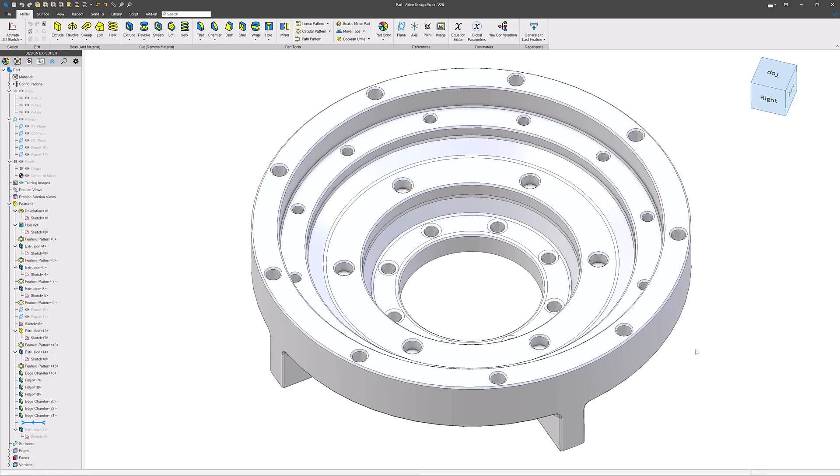There was a question on the Alibre forums recently that I thought was deliciously interesting and wanted to delve into. Here I have a part that might be able to demonstrate that question pretty well.

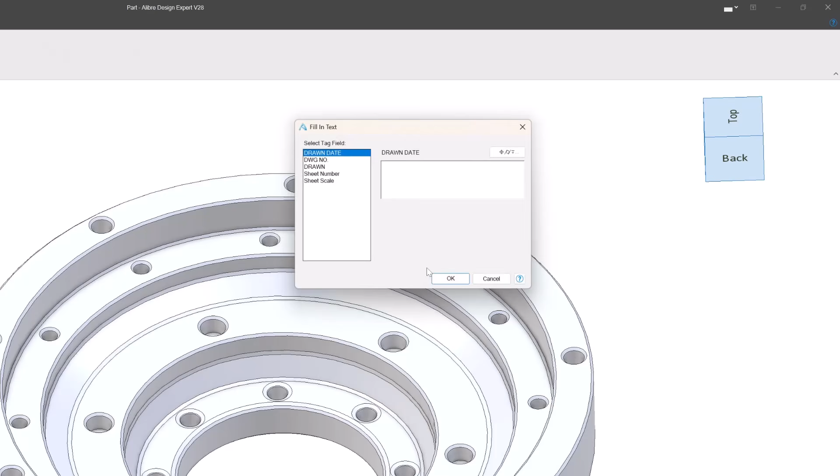We have some ribs, and let's say I want to take a section view and get a cross section of these ribs. For that, I'll jump into the drawing environment and talk about what that question was about. We'll say send to, make drawing, send it on, then get rid of the right view and say OK.

Now maybe I can adjust this so I can see my ribs. We'll say visible and hidden lines so I can see that rib sitting back there. I'll right click and activate a sketch in my view, create a line, and grab a midpoint constraint.

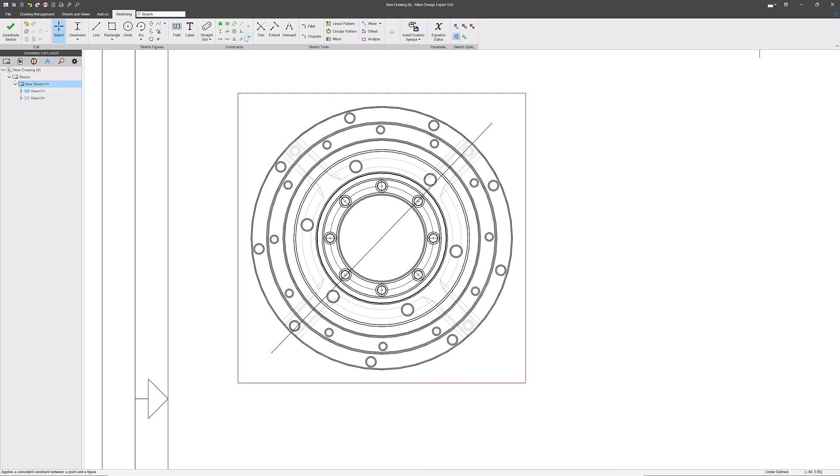We'll say that this line's midpoint should sit right in the center of our view, and since this is allowed to rotate, I'll grab a parallel constraint and make this line parallel to the rib. From here, I can grab a section view, and of course it asks me which way I want my section view to go. I'll select this one, and we're inserting a view that's about 45 degrees off horizontal. This is per, I believe, ANSI Y14.3, which talks about what the orientation of your section view should be. So we have some users saying, well, I want to rotate this view 45 degrees because I want it to have a more intuitive orientation.

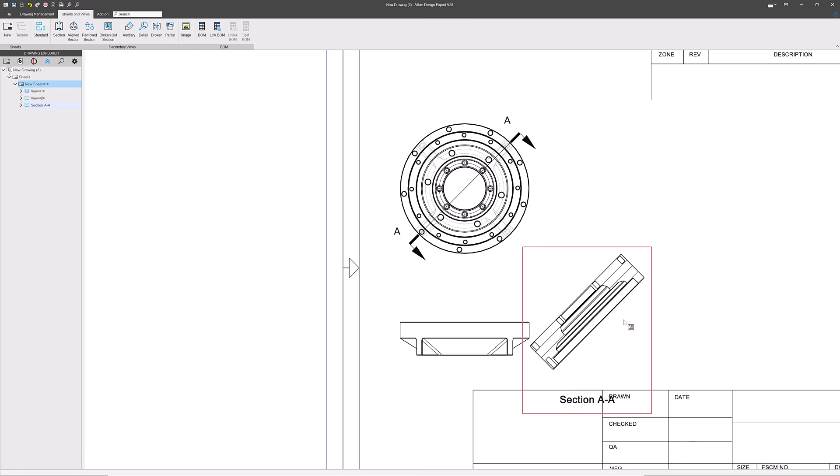And that's a fair request. I'm not aware that it meets any drafting standards, but sometimes you just need to draw something outside of drafting standards, and we have questions regardless, so I want to provide answers. I'm not going to claim that anything I talk about here is consistent with any drafting standard, but if you have a need to rotate a section view like this, let's talk about some ways to do so. The ways to do so are in this section line.

So one option that I have is I can add a little vertical. Now there's some things we need to be aware of. First off, when I go to create my section view, I'll click on this vertical here, and now I have one that is oriented in the vertical fashion.

You'll also notice there is some scaling going on, or at least some appearance of scaling. This is actually still in scale, but it's much smaller because we've cut this at 45 degrees, but we're looking at it in the direction of this arrow right here, so we're looking at a tilted, away from us, 45 degree version that appears smaller, and the dimensions aren't going to be accurate. They're going to be as if we measured the 45 degree angle from this vertical view. So this is probably not as useful.

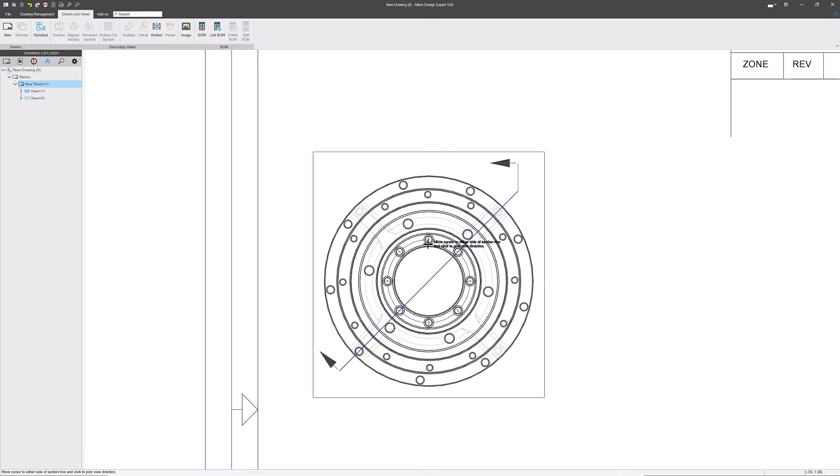And the other thing is, if I create a section view and click on my diagonal, that actually is the right size, and we're looking at it correctly and everything, but we're back to the 45 degrees. So how we can actually get this is we would say aligned section view, and just like that, now we're inserting one at the right size.

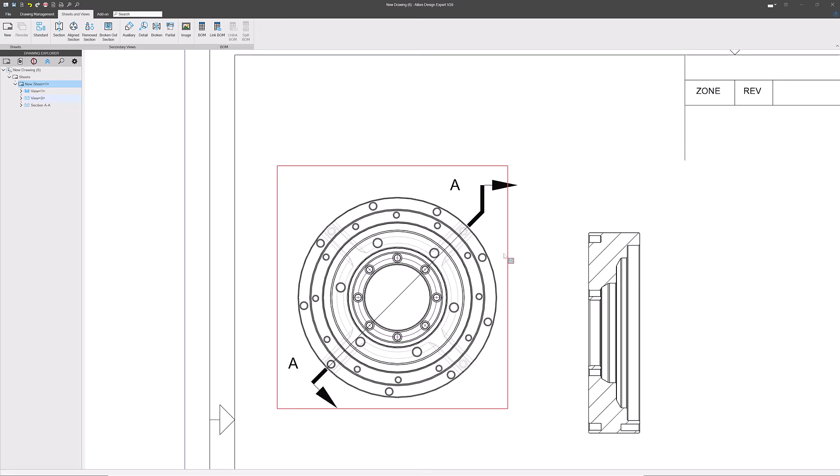Now that we've inserted this, we're going to see a few things. One, it's not aligned, right? If I start moving this, we can see it's not aligned with the previous view, but this is kind of to be expected because we've added this vertical plane of where we're also looking. So we have the entire length here, which if we stopped right there, we would be aligned, but now we have this extra view, so it pushes the view down a little bit.

Now we can always uncheck align and move our view so that we can be aligned. We can even add some helper sketches that help us align, and delete them later if we'd like to be really, really well aligned.

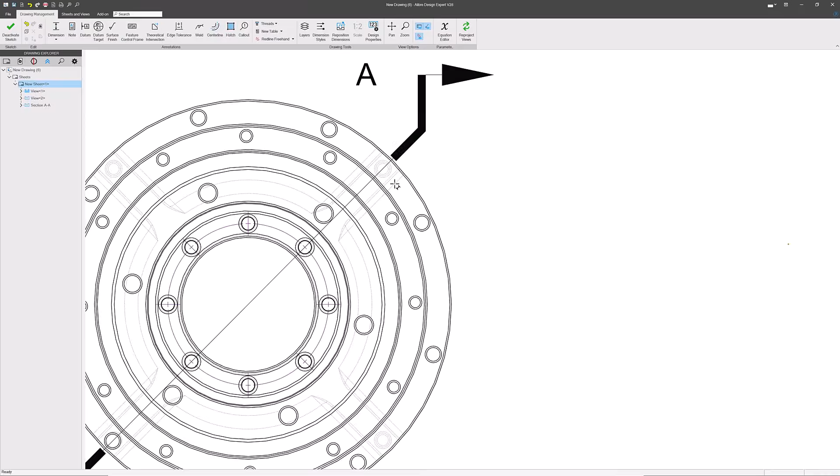But as you can tell, we do have a dimensionally accurate cutaway version, and we can see the holes here and here. We can also see these internal holes. If I have any questions, I can always add some dimensions to our drawing here, and I might have to click into our drawing. We're going to dimension here, and just like that we've got a diameter of 7.954. We'll come over here and give this a diameter of 7.954 as well, so we are quite exact from our parent and child views.

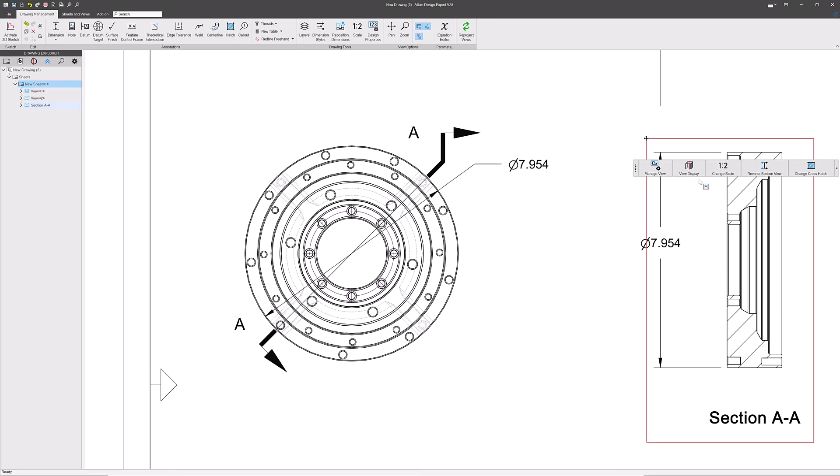A few other nuances we should be looking at. Notice that this vertical line has the arrow looking away from the model. What might happen if the arrow's pointed the other way? Because now part of the model would be intersecting the view of this vertical line. So I set this up deliberately so that this line would be looking away.

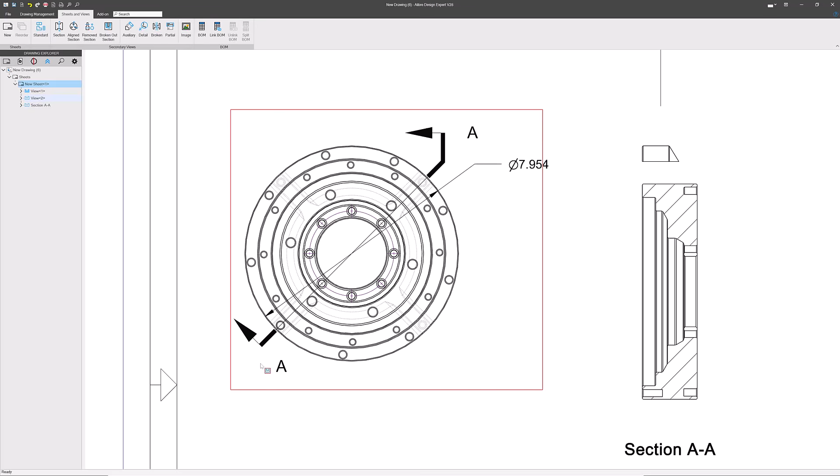If I delete my view and create another aligned section in the other direction, now I have this little extra piece, and of course this extra piece is what this vertical line sees looking toward the model. So if I want to go that other way, I should add the vertical on this bottom side instead of this top side to accommodate that.

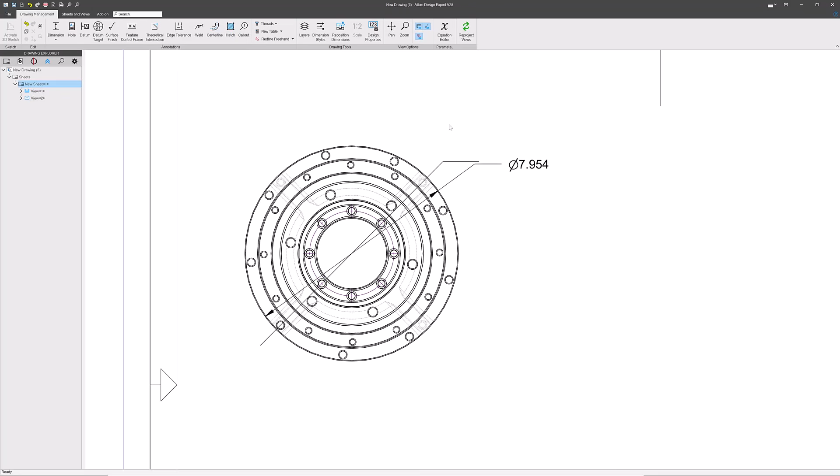So there are some nuances to doing this and some things to keep in mind, but we certainly are able to get this done and get an aligned section view that provides us with a desired orientation. Of course, I can go in and make another sketch here, and add in a line like this, noting that the arrow will point this way so that this horizontal line is looking away from the model. We can add in another aligned section view that gives us the horizontal direction. So this is a way we are able to get the orientation we want and still have the right scales and sizes without too much hassle.

So hopefully this is helpful.